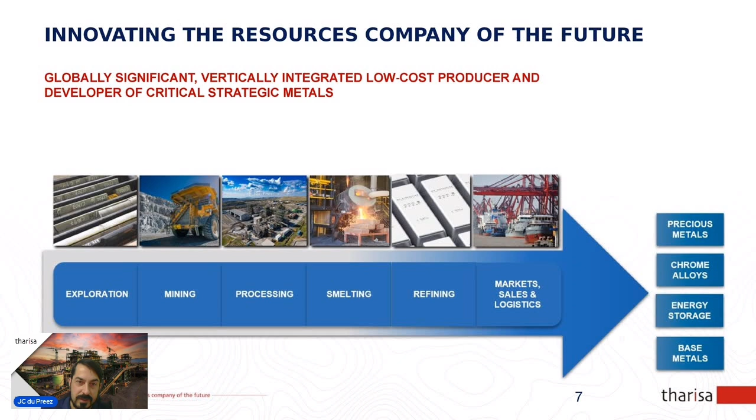And we mainly focus on precious metals, chrome alloys, and energy storage, quite exciting, and base metals for the market. Okay, that makes us quite diversified. To show you Tharisa's footprint, Tharisa Mine is right here in the northwest province of South Africa. That's where I'm based currently, and we are a shallow multi-generational mineral asset that we mine.

So meaning that, after myself, maybe beyond my retirement, the mines that we are developing and putting in operation will still be there for our future generations to come. So that's quite exciting, that whatever you do today has an impact going forward. You can see there on the presentation, in Dortmund in Germany, we've got Redox One, and that's an exciting product. It's an iron chromium redox flow battery that we've developed that you can go and do some research on.

Then Tharisa Mine. What's interesting about Tharisa Mine is it's the biggest open cast mine in the southern hemisphere that mines two commodities. So that makes us unique. The next one is Karo Platinum in Zimbabwe. That's on the Great Dyke. That's about 500 kilometers reaching from the south to the north. So we are right on that. And this dike includes deposits of gold, silver, chrome, platinum, nickel, and even asbestos, if that's something that you're into.

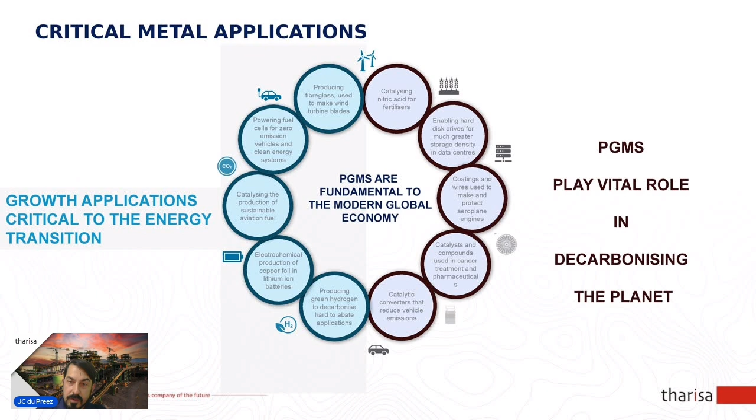The next one is the hydrogen economy that's quite growing, and that will provide a multi-decade PGM demand. So PGMs will stay relevant, and the major energy carrier, for example fuel cells in vehicles. The one I've mentioned is green hydrogen production via electrolysis using renewable energies, and PGMs assist and aid in the decarbonisation goal.

So an interesting fact about chrome is there's no substitution for chrome in stainless steel production. So we're going to need to be aware of that. It's safe, cost-effective, reliable, sustainable, and scalable. And close to home for us, our Redox 1 iron chromium redox flow batteries are poised to power a decarbonised future in a market growing to, we estimate, about $3 trillion US by 2040. So that's a cool space to be in.

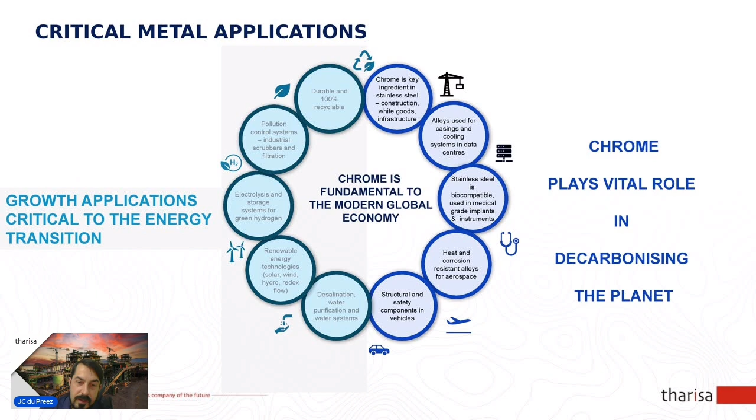And then according to the International Energy Agency, by 2030, the world is projected to grow intermittent renewables by 3 times, reaching nearly 50% of the electricity generation capacity. So there's a demand for electricity, and the capacity is going to grow quite significantly. And that adds an additional 1.8 megaton per annum of chrome concentrates required to sustain this 3.5% compound annual growth rate in stainless steel. So, yeah. Interesting facts, Christa, that you probably did not know before.

Okay. Right, closer to today's session on the award that we received for our innovative approach. Just for some background first, Tharisa Minerals' positive environmental impact is that we plan to reduce our carbon footprint by 30% by 2030. We aim to be carbon neutral by 2050. We've already started with a 40 megawatt solar plant, with the Environmental Authorization awarded. We have been awarded to do it. And we started with our first phase of a 30 megawatt solar plant in Zimbabwe.

Okay, so yeah, the I in Tharisa stands for innovation. And our digital energy platform that we're going to speak about today gave us operational insights that have significantly reduced our carbon emissions. And our innovative approach is delivering measurable value with approximately 2,000 kilograms of CO2 emissions saved for each hour of reduced generator runtime. So in the next couple of slides, you will see how we got to that. Okay, great. I trust everything is fine.

Okay, our problem statement, and how did we start off? I mean, I'm an engineer. My focus is solving problems, and initially there was no idea to say, okay, let's go and find a decarbonisation project. It was actually just this. So what it means is when you actually just solve problems, you can indirectly, like in this case, contribute to decarbonisation and have a positive effect by just applying basic principles and following it through.

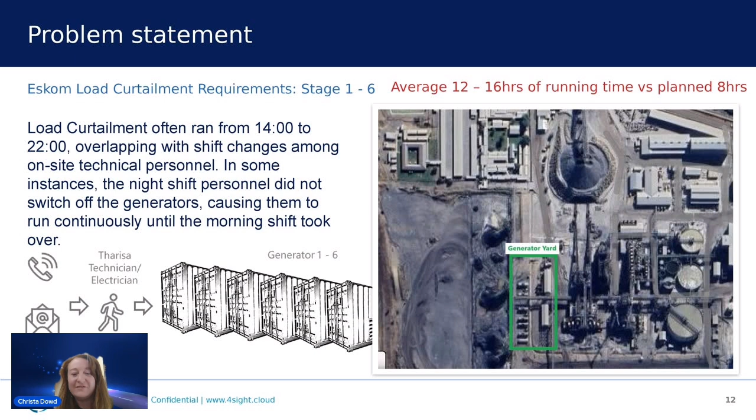Great, thank you, JC. You certainly mentioned some statistics that I haven't memorized, but Tharisa is an interesting research environment as well as an operational environment, like you mentioned, with the I for innovation. So just to give the highlight, we actually won an award for the project that we implemented, which I'll tell you about shortly.

And it's quite an honor to be noticed by Schneider Electric, as they have been noted as the world's most sustainable company by Time Magazine in partnership with Statista. So globally, they've been awarded this status, and to be recognized by them as a local entity in South Africa is still quite an honor.

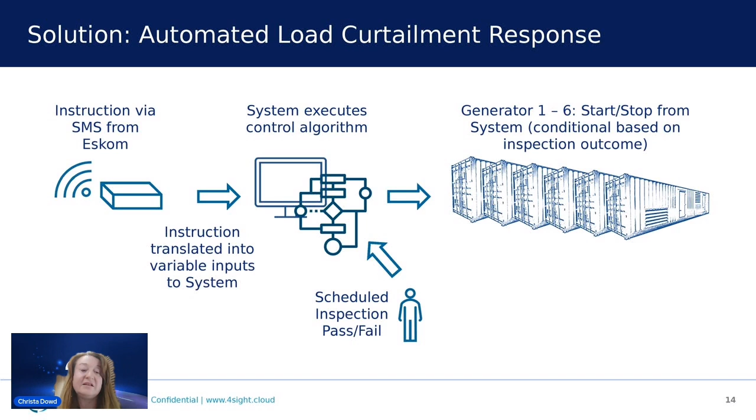So what we actually did at Tharisa was to look at what we can do to automate the entire process. And first of all, we needed the control parameters, which would be the stop and start time of the instruction that we got from Eskom. So that was encapsulated within the SMS instruction, but there's also a percentage of reduction that's expected. So if it's stage 1 and 2 load shedding, for example, or load curtailment, you need to drop by 10%, 20%. So those parameters were all derived from reading the SMS instruction.

That instruction is then added to an algorithm that determines the priority of the generators that we want to start up. So we would look at historical parameters from the generators, the time to service, the running hours, and look at how we can best optimize the generators in use.

And of course, we'd rather use a generator running at a higher load and more efficient than starting up multiple generators at a lower load. So all of that happens within the control algorithm.

And one of the critical inputs that JC alluded to is the requirement that these generators still should be physically inspected. So the operator or the technician would, on a scheduled basis, inspect the different generators, go through the maintenance requirements, and mark the generators as either being available for automated switching or

out of the schedule. So on the diagram, you can see the process flow from the SMS instruction through to the algorithm, then automatically stopping and starting the generators to comply with the Eskom load curtailment instructions.

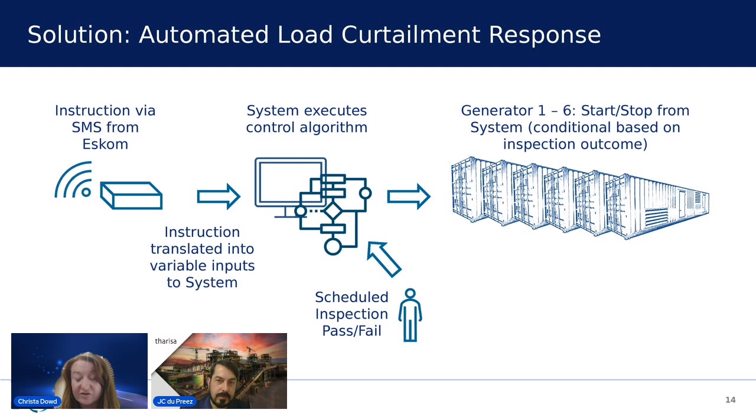The physical world. So what we did at Tharisa is on their medium voltage network, we installed the 3 meters on their Eskom intake points on the 11 kV bus. Then we've also installed the 2 generator feeders in that same substation to get a view of the actual takeoff from the Eskom grid and what is supplemented by the generators.

We integrated to the 6 individual generator controllers, and this allowed us to create a rich real-time visualization of not only the control schedule, but also the parameters of each individual generator. So previously, they didn't have any way to remotely stop and start the generators. So now we've added that functionality for the remote stop and start, and we've also added the automation of the

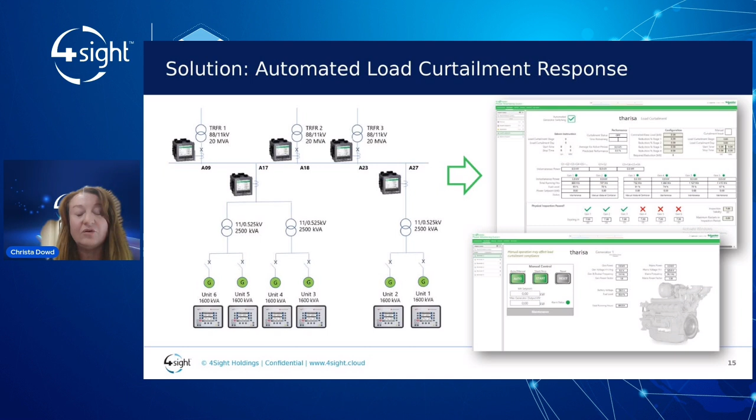schedule. So just as an additional highlight, the meters that we installed are actually world-class meters from Schneider Electric. They're class 0.2S accuracy, in line with your requirements from the utility side and our national standards. And they're also a class S power quality device, which allows event notification and detection of sags, or network voltage dips in your network. So that added a lot more visibility to Tharisa, which they previously did not have.

So the outcomes of this project were not only to have a compliant response to the Eskom load curtailment instruction. There's an example on the right-hand side where they now have optimized the generation on-premise to comply with Eskom's takeoff requirements. And we've also added visibility of their actual consumption, which was previously missing. We improved the load curtailment control by knowing what the actual base load is.

So the way Eskom evaluates it, you have a scaled base load. You provide them with some historic data. They calculate your base load, and based on your actual consumption on that day, that base load is either scaled up or down. That will allow you to start fewer generators or ramp down a generator if you can still be compliant up to 80% of your performance within that permissible period.

We also now have a much richer data set to provide reporting on. And as I mentioned, these power quality devices provide insight previously not visible. One added benefit of these meters is they've got sliding window demand modules, which allow you to do maximum demand prediction. And if you're looking at cost reduction within an operation this size, it's significant not only to look at your power factor for reactive energy, but also at your maximum demand contribution.

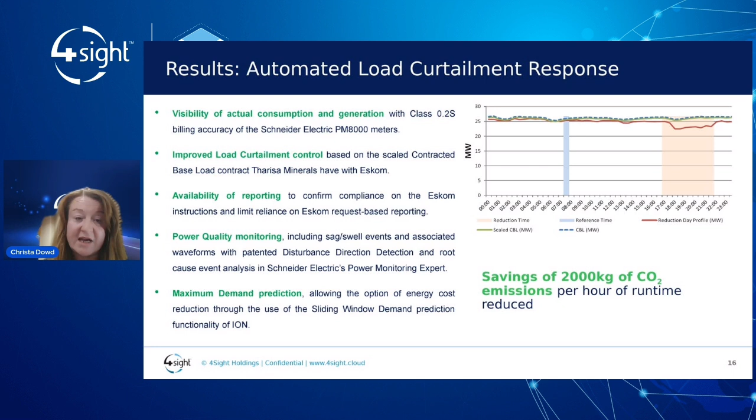So you're penalized over a 12-month period for your maximum demand, and now you can have an upfront warning if you will be exceeding this maximum demand within the 30-minute time frame that Eskom is looking at. So through the automated control of these generators, we are saving, like JC mentioned, 2,000 kilograms of CO2 emissions per hour of runtime reduced. So at 10 at night, it's switching off and there's no shift changeover problems because it's all running from the digital environment.

Looking at data and energy in general, I think it's critical that operations include energy data and the related data sets in their overall data strategy. We come across so many instances where there's quite a big gap between our OT environments and our IT environments, and how that facilitates the operational needs of the facility or operation. So just keeping that in mind, if we are driving sustainability objectives, which are typically quite, I can't think of the word now, but lofty goals that we set ourselves.

It's important that we have the structures in place. So we want to have visibility of whatever we need to control. We need to be able to control it smartly and drive these sustainability objectives.

And just out of a point of interest, if we look at the Eskom annual report from last year, they're using 1.4 liters of water per kilowatt hour produced, and that's equivalent emission on CO2 is about 1 kilogram per kilowatt hour. So if we multiply that by our own household or operation like Tharisa or our national consumption, those numbers become significant. So creating visibility and managing that effectively becomes more and more urgent, actually, if you look at the dire consequences of not doing so.

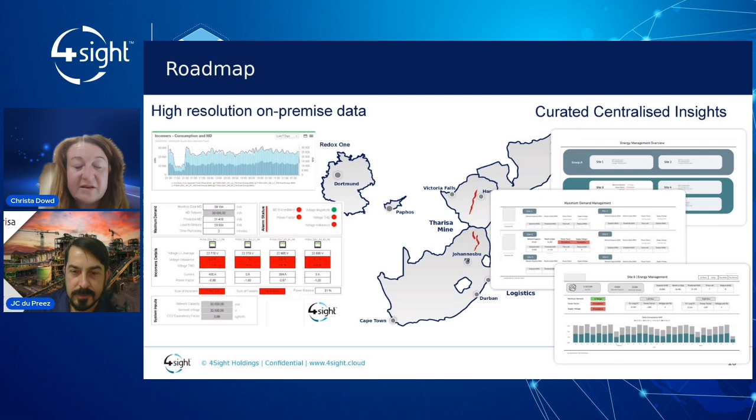Okay, cool. Thanks, Christa. No, thanks, JC. We always talk about the art of the possible at 4Sight, and what we've showed you is a simple solution, and there's the building blocks of so much more enabled through what we've already done.